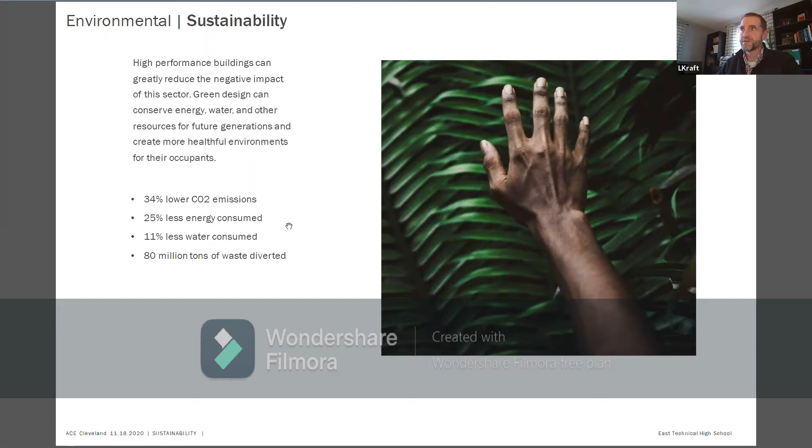And then in terms of people's health in a building, a sustainable design also promotes healthy building occupants. There have been many case studies showing that, for instance, in an office building, a sustainable building helps produce more productive employees and happier employees. It decreases sick days, which of course goes into increased productivity.

And at stores, there have been case studies showing that when there are sustainable attributes like natural daylighting and better ventilation, store spending is up. And finally, if you look at schools, case studies say absenteeism goes down and test scores go up when you have a sustainable building that's geared toward the health and well-being of the occupant. So another very key factor to consider when you start your ACE project.

So how do we measure sustainability? Because it's somewhat, I don't want to say vague, but there are a lot of things that could be looked at in terms of sustainability and how it's measured. What we have on screen here is 5 different systems that measure and score your building in terms of sustainability. And there are absolute tons of them, dozens and dozens.

But these 5 are some of the top ones in our area, with LEED in the middle being probably the most popular in the area. That's a system that's been around since about the late 90s, and like I said, it's very popular with the state and with private developers. So we're going to spend a little bit of time on that system just to understand it and how it relates to sustainability.

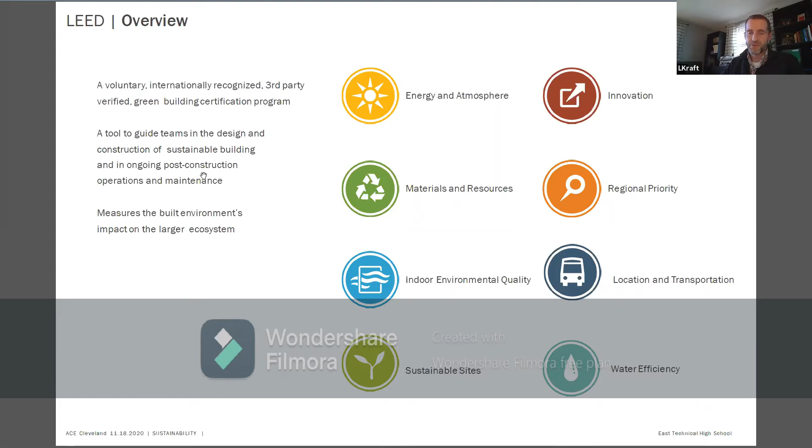So certified is kind of your baseline. You're a little bit better than most of the buildings in your area, all the way up to platinum, which is very hard to obtain. There's a lot of effort and design and typically money that goes into that to achieve that status.

And it also affects our local codes. So about every three years or so, we adopt a new building code, and it's based on the International Building Code. And as sustainable design and products and processes improve, they adopt those into the code. So what would have been a really cool feature that would have been silver related back in 1998 is now just basic code that you have to do. So again, we're always building up to a better and better level, and it's getting more and more difficult. But it's the challenge that makes what we do very interesting.

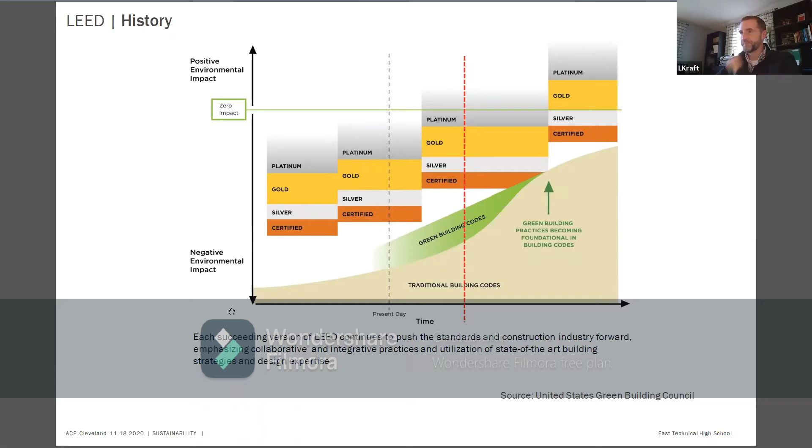Excuse me again. So from a local area, Cleveland does pretty well with their level of LEED buildings. There are other buildings in the area that use other rating systems, but if we want to stick with the LEED versions, there are over 273 registered and or certified projects in the Cleveland area.

So registered means you've signed up for the system and you're going after the credits and trying to go after being certified. And certified is whether you actually pass all your credits and the governing body said, yes, you've met these requirements and you are now LEED certified. That equals over 21 million square feet of certified space. So again, I think Cleveland's doing pretty well.

And in the Cleveland area, we've got 12% that are certified in the certified arena. 49% are silver, 36% are gold, and 1% are platinum. Again, the platinum is very challenging to get to. Certified, that number is easiest to get to. It's kind of low because silver is actually pretty obtainable with a pretty basic good design for sustainability in mind.

For instance, a lot of the state projects, whether it's a new K through 12 school or a new building at a university, if it's state funded, they usually require a minimum of LEED Silver. So they've kind of set the bar of, hey, we recognize how important sustainability is.

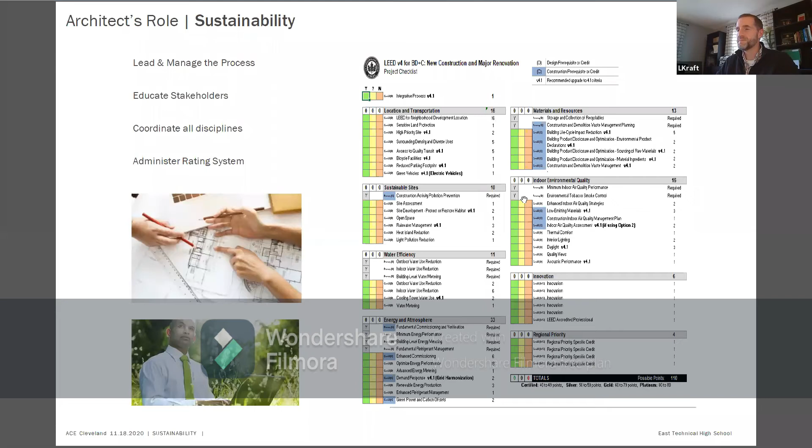but we'll really want to focus on the ones in the yellow column. So those are the maybes. Those are where we could focus our design to make sure we hit that. So the architect will maintain and look over that checklist as we go through the process.

So in general, architects' roles continue with site selection and building orientation. Not too often are we blessed with the opportunity to help the owner select a site, but sometimes we are. Most times the owner already has the piece of property in hand. But if he or she doesn't, then we can obviously assist in looking at different sites to see which one is best from a sustainability perspective.

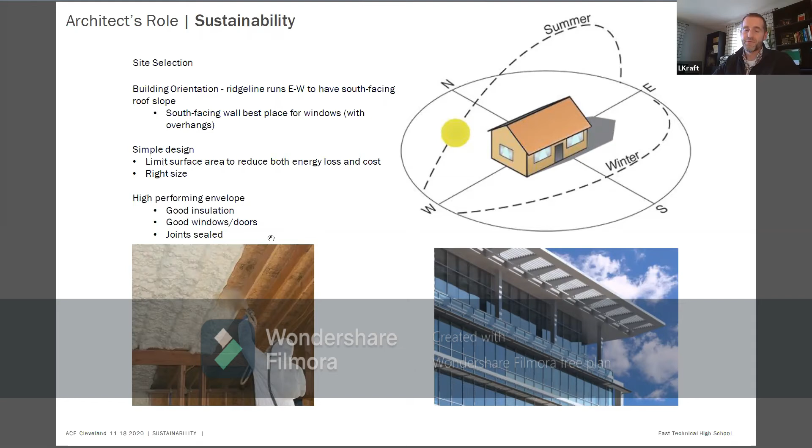So we talked earlier about embodied energy. How much energy went into making that brick, and it would be kind of a shame just to tear it down and throw it into a landfill when this building, regardless of whether you think it's beautiful or not, has so much potential to be something new and fit a current need. So reusing buildings that we have in general is a very, very sustainable avenue to take.

And then recycling construction waste. So when you demolish and build a new building, or even when you're building a brand new building from scratch, there's going to be waste. We make sure we divert that and recycle as much as possible.

And renewable materials. So there's materials that can be made out of bamboo, made out of old denim, made out of straw and wheat products. So there's products that can be used as a renewable material, so that when you cut it down, it grows back extremely quickly, so you're not depleting the earth of its natural resources.

And then low VOC materials. I don't know if anybody's heard of the term VOC. That stands for volatile organic compound. So if you ever get into a new car, or if you get new carpet in your house, or even new paint on your walls, and you smell that smell, it's like, oh, new carpet smells great, or this new car smells wonderful.

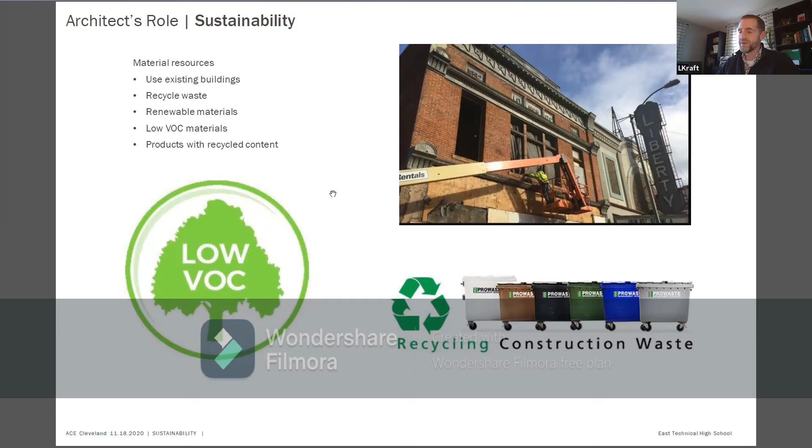And then switching gears to the owner's role, that's kind of where sustainability starts. Sometimes the design team needs to educate the owner on why it's important, but when you have an owner on board that knows and understands the importance and is committed to sustainable design, it makes the project a whole lot easier. We're very fortunate here.

And they understand the short term. It's obviously good when you're designing the building, but it's also very good in the long term, in that it saves energy, and the building occupant health and the benefits they get from that. So when they understand the benefits of it from the very get-go, it's a very good beginning to the process of building design.

All right, so I've rambled on enough. I'm going to hand it over to Fred, who's going to talk about civil and structural engineers and their roles in the process of sustainability.

So just real quick to remind you guys what a civil engineer does. The civil engineers, they design a lot of the aspects of the project site or the land around the building. They design the site structures that allow for movement of people and things through the site, parking lots, drainage ditches, things like that. The underground utilities on the site, like the sewer, the gas line, the electric line. They determine the existing site grading and lay out the new site grading, and that's the slopes, the hills of the site, if it's flat or if it's sloped or if it's hilly.

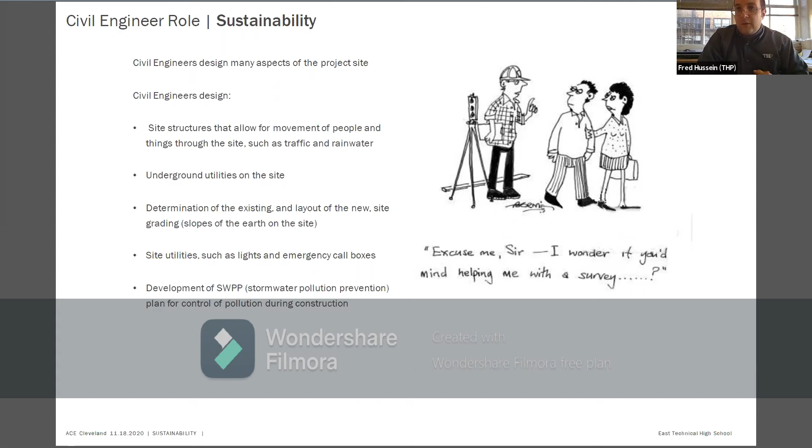And so some of the ways that the civil engineers use what they design to make the site more sustainable would be to control stormwater runoff, which helps control pollution. So they'll use some retention basins or structures. They'll use pervious pavements, which there's quite a bit of in Public Square. It looks kind of like concrete that looks like a Rice Krispie treat.

They leave out some sand and water can drain through it to the groundwater, which allows filtration of pollutants out of the water naturally before it makes its way into the lake. And then also stormwater filtration systems. Sometimes they'll collect the water and actually filter it before dumping it into the sewers.

Civil engineers will also integrate sustainable technologies into the site. So one example is if you go to UH main campus, I think Metro has some of them too, and Cleveland Clinic, in their parking garages, you'll notice electric car charging stations in some of their parking lots and parking garages to help promote the use of electric cars. They'll also specify low energy usage site utilities, some of which will be solar powered, some of which are LED, things like that to try to limit the amount of energy used.

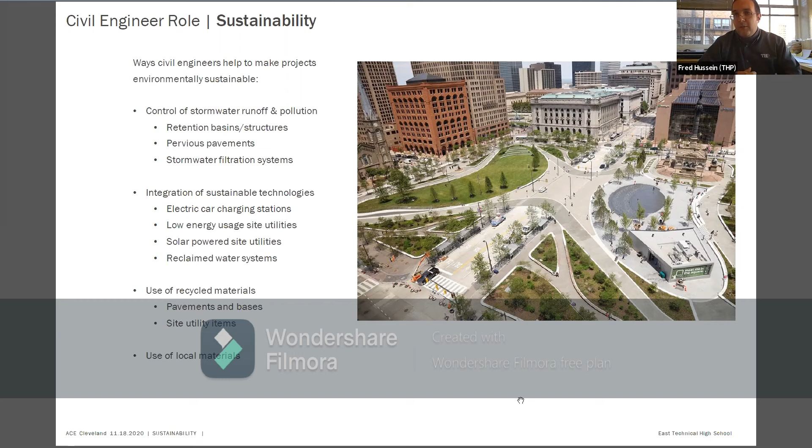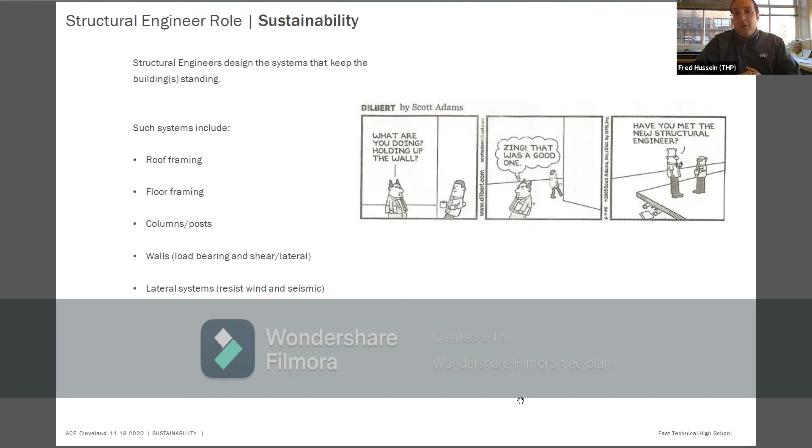Sometimes they're shear walls, lateral walls, things that keep the building standing after we have a big windstorm like we had last week. If you could go to the next slide, please, Luke.

So remembering what a structural engineer does and relating it to sustainability, one thing we can do which helps with financial and environmental sustainability is optimizing the structural systems we design to use less materials. That's always the goal of a structural engineer, sustainable or not. We can also use sustainable materials. Examples of that are wood and bamboo.

And wood, if you guys shop at the West Side Market and you look across the street, or if you read about it, there's a new pretty large building made out of wood being constructed there. Right now, I think all you'll see are the concrete shear walls and things like that. But the use of wood is becoming more and more popular in the industry. And then there's some pretty interesting experimental materials out there.

One of our teammates that helped us put this presentation together is Chris with Red House Studios. I encourage our students to look up Red House Studios and some of the research they're doing. They're using the roots from mushrooms and compressing them and making boards out of them to make houses. So you can harvest the mushrooms and put them on your pizza or cheeseburger or whatever you like, and then you can compress the roots and build your house. It's incredibly interesting.

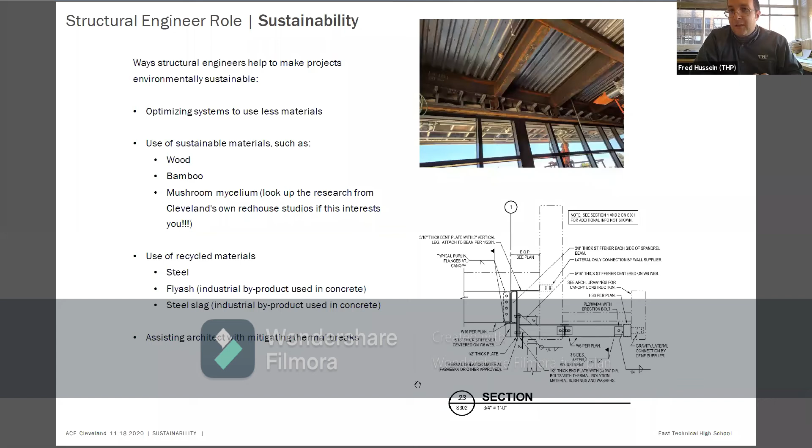And what that does is it'll try to pull warm or cold air into the building. And that makes it harder for our friend Abad to heat and cool the building and keep it a consistent temperature. So we'll go through and put thermal breaks there, which is like a plastic material or an insulated material to break the system to allow thermal isolation so that conductivity cannot occur. And with that, we'll hand it over to our friends at Algebra AEC to tell you all about the blood vessels and heart and all that interesting stuff.

Yeah, so the mechanical engineer, in terms of sustainability, they're just trying to balance two things. One is the human comfort and health of the occupants, and the other is, of course, the energy. And it's those two things that are the key elements sustainability wise. The other, of course, being the economic sustainability.

The first thing that a mechanical engineer would do is to look at the climate of the site and the building. Obviously, if you're building something in Ohio, in Cleveland, you're going to approach your design differently from if you were building in Hawaii or in the desert or wherever you would want to go.

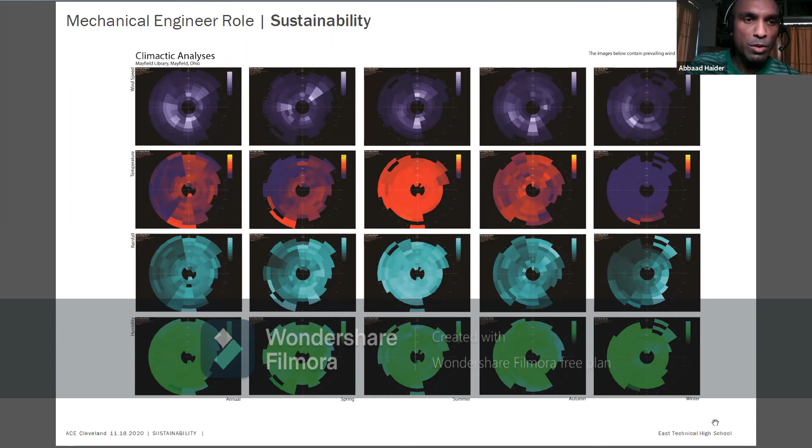So right here we have a yearly analysis of the wind and other environmental and climatic data in different directions. So this is like a compass rose for different data points: wind speed, temperature, rain or humidity, in different directions for a typical site in Mayfield, Ohio. If you could advance the slide, please.

And once you have that climatic data, you want to do some studies to see what sort of measures you can use in that climate. So here's two different types of measures you can use. They're both types of economizers. Economizers are a way to use the outside air, which might be cool enough or warm enough, to supplement the air that you supply to your building.

Some of it is actual data, and sometimes you use simulations to generate these plots. But it basically lets you see which parts of the year you have temperatures that are low enough outside that you can use the air outside to actually supplement your cooling.

So for example, the left plot shows from January to December, from left to right on the horizontal axis, and the vertical axis is temperature. And you can see some of the year that's been colored blue, you have cool enough outdoor air that you can actually economize the supply air for your mechanical system. Luke, could you please advance?

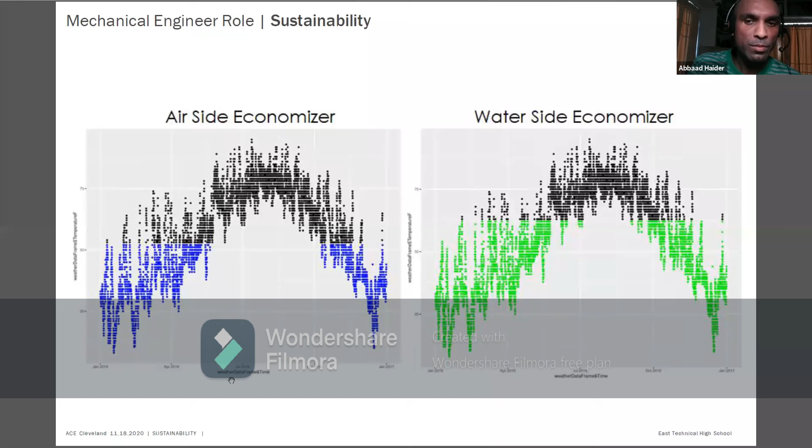And then the bulk of the mechanical design, the role of the mechanical engineer, is to design the HVAC system. HVAC is heating, ventilation, and air conditioning, cooling, refrigeration sometimes also thrown in there. And what does that mean? It means making, as Fred said, the sort of circulatory system of the building, where you want to circulate new fresh air and take out old air. You want to make ducts to send this air throughout the building.

You don't want to make the ducts too big because that takes up space. But you don't want to make them too small either, because the smaller you make a duct, the harder it is to move air through it. So if you've ever considered blowing into a straw, it takes a lot of force for your lungs to blow into a straw. It's the same idea with a duct. The smaller the duct is, the harder you have to force air through it, and the higher force translates to using fans that take up more energy, or using supplemental fans in between.

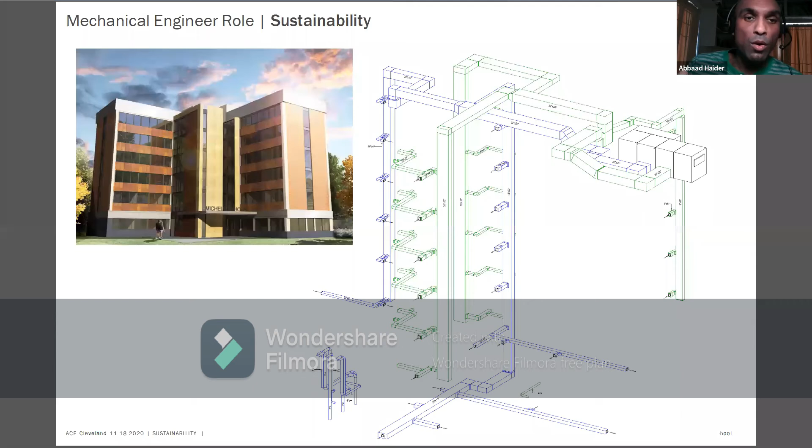So the job of the mechanical engineer in this aspect is to balance those two design features, to make the ducts in a way that gets the air to where it needs to be, but also isn't over the top. Can you advance, please?

Other measures that you can take in terms of sustainable design is when you specify different types of equipment to use. For example, in this climate, we often use condensing boilers. A condensing boiler is a way to heat a fluid up, move that heat around, and extract that energy from the fluid. A condensing boiler is a little more efficient than a standard boiler in that the waste gas is actually used to preheat the fluid. So you're sort of double dipping into the amount of energy you put in, and you can get efficiencies up into the 90% for something like that.

In the diagram below on the left is a type of system called geothermal, where in the wintertime you actually extract heat energy from the ground, and in the summertime you take heat energy from your building and sink it into the ground, the ground being a reservoir that, when you're deep enough, can take or give a lot of heat energy. It has what's called heat capacity.

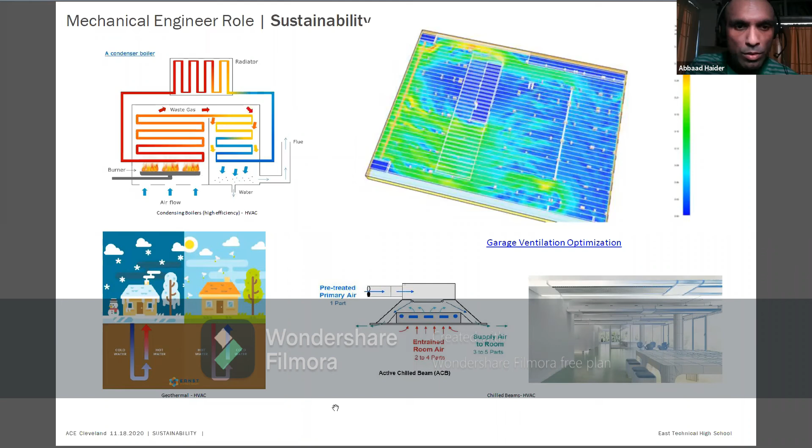And just, it's 2:53, just to be cognizant of time.

Sure. So the other thing, in terms of analysis of spaces, that the mechanical engineer would do is to see if there's any problem spots. For example, this is an analysis where you can see in red the outdoor air temperature and in blue the room temperature. When people open a window, for example in the middle of the plot, you can see that the blue tracks along with what the red is doing.

That was a problem where the owners of the building were complaining that occupants were feeling cold, but it turns out that people were opening windows and forgetting to close them. So doing an analysis to see where these problem spots occur is one way to see that. You could advance, please.

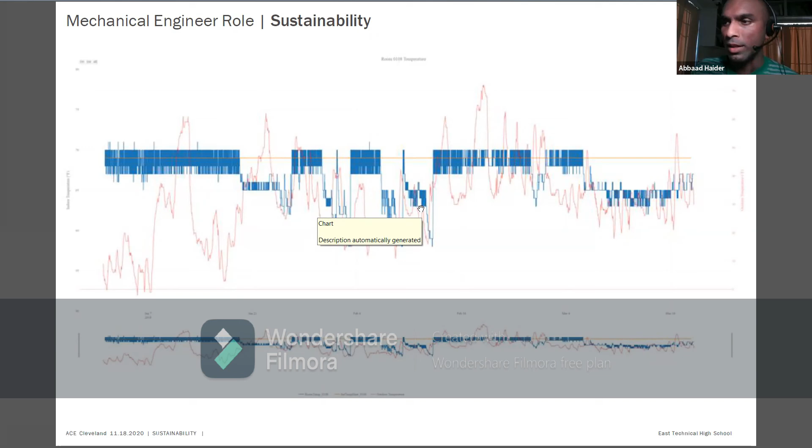The plumbing systems are, I guess, ways to move around water and save the amount of water that you use. So the most obvious method that you might see is a dual flush toilet, where you flush half the cistern or the full tank, depending on whether you go number 1 or number 2.

There's solar hot water, which is a way of, rather than using a boiler, or supplementing a boiler, heating water using solar panels, not electric solar panels, but actually pipes with water in them. You can also collect rainwater runoff and use that for supplementary gray water systems. If you could just advance to the next slide, please.

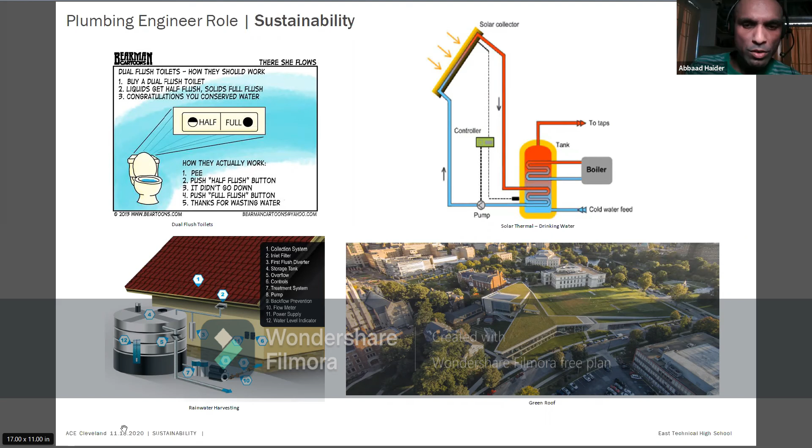The electrical engineer, in terms of sustainability, is probably designing things in terms of lighting and daylighting to make sure that the human occupants have a comfortable environment and a healthy environment, and trying to optimize the amount of sunlight coming in, but not to the point where it's creating too much heat in the space, which can actually be detrimental.

So you're playing another balancing game here with the amount of sunlight that enters the building. You want to use the useful visible light, but you don't want too much heat generated. And you also want to minimize glare. So there's a few different analyses here. The one on the left is just the amount of daylight entering. The couple in the middle and on the right are about minimizing glare, or hot spots where glare could form. If you could advance.

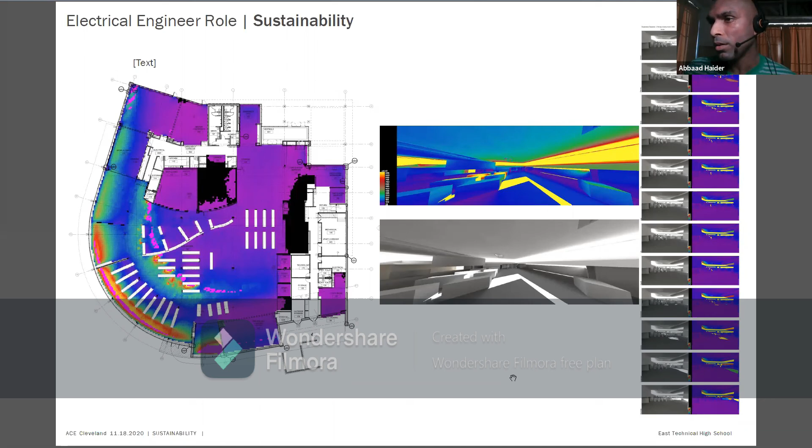Other things the electrical engineer would do is electrical solar panels, which are photovoltaic solar cells, in conjunction with the typical grid power, or maybe in place of it. In addition, you can use wind power. So those are the two at the top.

Also, you want to plan out and do an analysis to see whether you can decrease the number of, so for example, in the bottom right, you see a plaza space. This is actually part of the Tri-C Metro Campus Plaza. And the analysis here was to minimize the number of light poles in the space, but achieve a blanket of adequate light

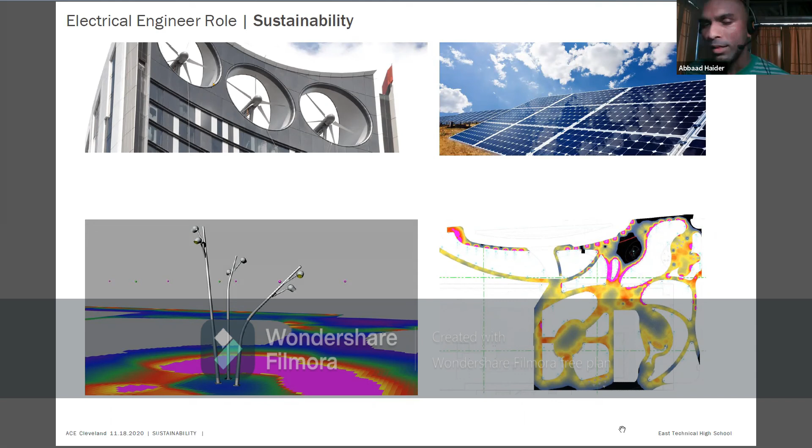level across the entire space, but not have too many poles, because those light poles are always on at night, and just wasting energy if there's too many of them. And I think that's it for MEP. So we'll bounce over to our last major role in sustainability, and that's the contractor's role. And Bill Panzica will speak to that.

Yep. So as we've said, this is a very designer-led process in terms of sustainability. Typically, as the contractor, our role falls under two main categories. One is assisting the design team and the owner with the design of the building, and the second is managing the process and ensuring that those measures are taken into account and actually realized as we build the building. So in assisting with the design, our role is typically weighing in on application and lessons learned.

So for the many different sustainable products and methods out there, weighing in on what's been successful, what will work in the given application, giving our opinions on things like that, as well as sharing how we've seen problems solved in other buildings, just helping apply these things between the different products. The second is with life cycle analysis.

Luca talked about this earlier, but a practical example we've done on a lot of different projects is helping the owner and the design team evaluate which type of HVAC system to use. One we've had a lot of times is using a PTAC, which is a through-wall air conditioner unit like you would see in a lot of hotels or smaller buildings, versus more centralized systems, which are more initially costly.